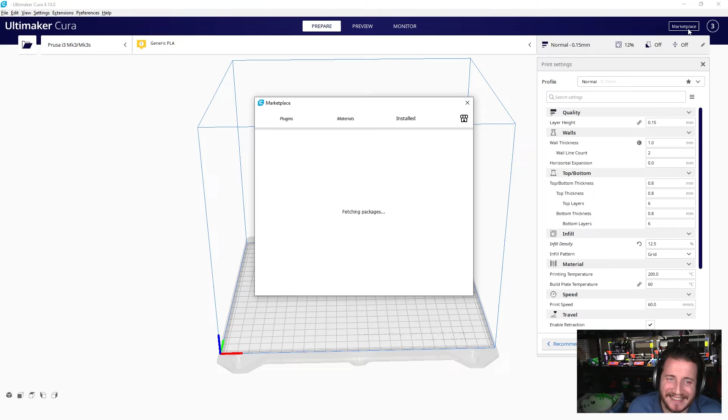But I don't have too much of an issue with Cura. Ultimaker has some amazing security policies, and they show them all to you. So let's take a look at the marketplace. The first time you load in the marketplace, it is going to take a little bit to load. So it's not your computer, it's just the marketplace is slow.

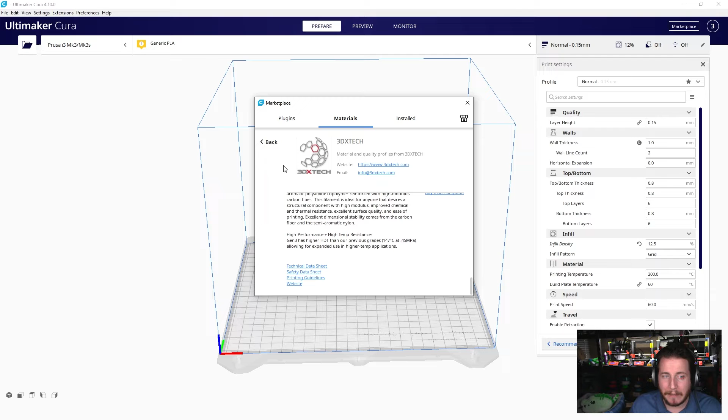Just let it go. Now, these are some of your basic plugins that work with Cura. I believe there are 58 in total. You've got materials as well. So if I wanted to say, pull some 3DXTech materials, you can pull quite a few of them. People have put these in there already. And you see that there's lots of other options available too. You guys can see these are all of my installed ones.

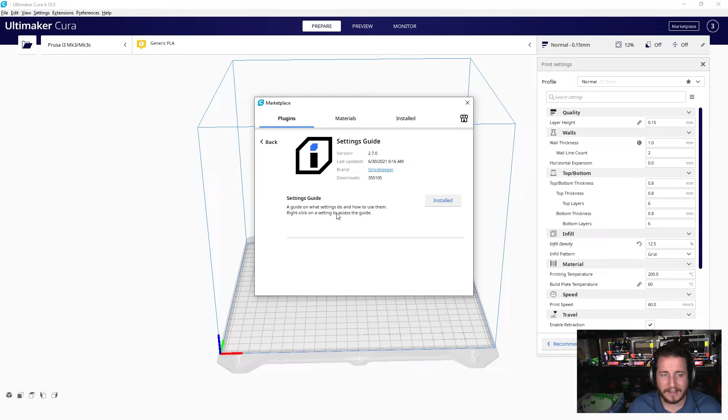Let's just go through them. The first and foremost plugin that everybody should have, and if you don't have it, go get it right now, because it makes the actual user experience of Cura considerably better. It is called the Settings Guide. It is a guide on what settings do and how to use them. Right-click on a setting to access the guide. It is the most important marketplace item. If there is one item that you get, it should be the Settings Guide.

It is just brilliant and useful for both newbies and experienced users, since most people do not know all of the hundreds and hundreds of settings by heart. And yes, there are hundreds of settings inside of Cura. It's kind of crazy, and spoiler alert, this thing is way better than you think it is. There are, for some of them at least, pictures of how it works, phenomenal descriptions, and even on ones that have way more detail, links to take you to other websites to learn more. Man, so good, so freaking good.

The next one is going to be Mesh Tools, and this thing adds several mesh analysis and manipulation tools. This is by Field of View. You're gonna see this name come up a couple of times. Field of View makes a lot of really great plugins for Cura, so keep an eye on them for future plugins coming soon.

But it adds easy tools to help you split STLs that contain multiple meshes into separate parts, which is something that Prusa Slicer can do. If you're wondering all about Prusa Slicer, we'll card to that video right here. But Cura can't until this add-on.

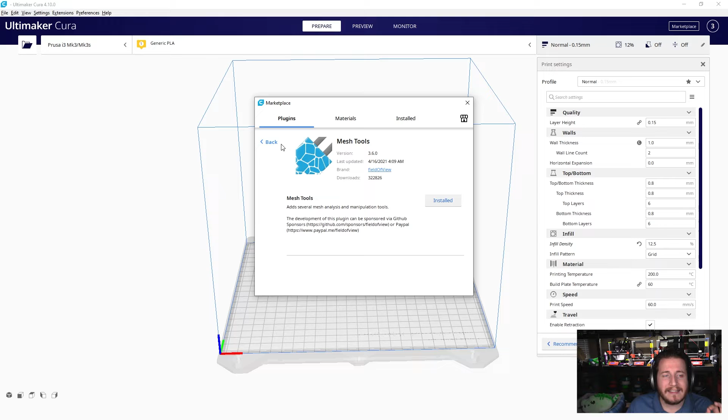This is great, and again, these are all free, freaking free. The fact that this kind of stuff comes at no additional charge to the consumer is mind-boggling to me. And it makes sense why Cura's like, we're not gonna take the time to implement it, because there are such good implementations on the plugin side. And yes, quick Google searches will lead you right to the marketplace, which is right up in the top right-hand corner of your screen.

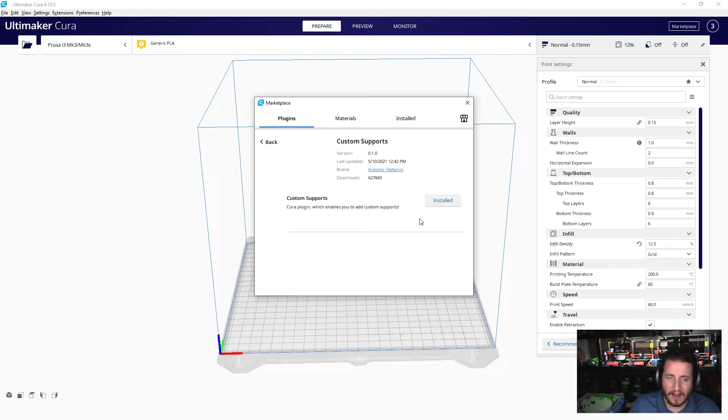We've also then got something that I wish Cura would bring in natively: their custom supports. It gives you tools to easily create custom support material if you only want it in part of your model, or want to add to support you've already generated.

But do note, this is exact verbatim from Eric: one thing that is a bit unintuitive with the custom supports plugin is that the support you place are affected by all the normal support settings, which are hidden if support generation is turned off. So if you want to have support in a specific place, you might have to turn on support generation, set the settings as you want them, and then turn off support generation again before slicing, so you don't have supports added everywhere. And I think those big things are more toward the contact Z distance, the overhang threshold, and how far your support is from your part.

So do make sure that you do that, because even if those settings are hidden because you have support turned off, it still matters. Something to note, but I believe once you understand that bit of it, it makes sense, right? That inherently makes sense to me. It doesn't use its own custom set of settings, it pulls it directly from the machine itself.

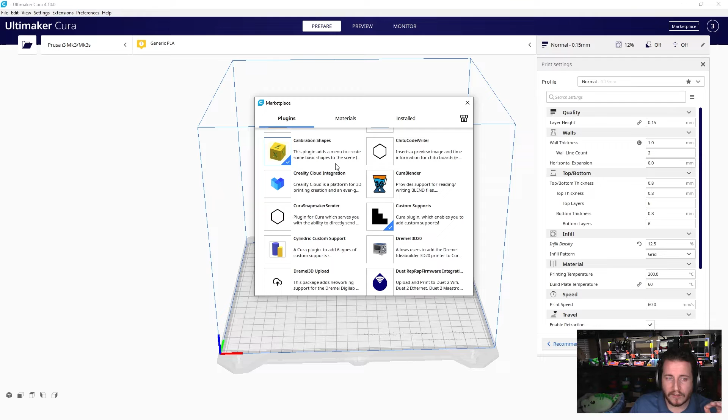Startup optimization. Now, I already have startup optimization installed. What I can tell you is, from my experience, it does save some time on the startup. What it definitely saves time on is all of the computational math that occurs inside of Cura, because it only loads the things that you need.

Cura has an architecture that loads exactly every printer, material, and profile that you have installed in your system each time you start it, and this makes the startup process pretty slow, especially on low-end systems. This is even further exacerbated when you have hundreds of printers and materials that you're playing with. This is why businesses tend to grab onto a brand or two max, so that you don't fill up your printers with tons of different ones. The more you have, the more cumbersome this is.

Now, this is a pretty clean install of Cura, so there's not a whole lot on there. So Startup Optimizer doesn't do a lot for me. Mind you, we are also running a reasonably high overclocked computer, which definitely doesn't point to why the computer randomly locked up when recording a video.

It couldn't be my fault now, could it? But it does assist this, and that's important to me, right? It disables loading of anything that is unused, any materials you're not using, any profiles, and just loads what is relevant to you currently. Now, if you go to switch in other things, it will load those as you go.

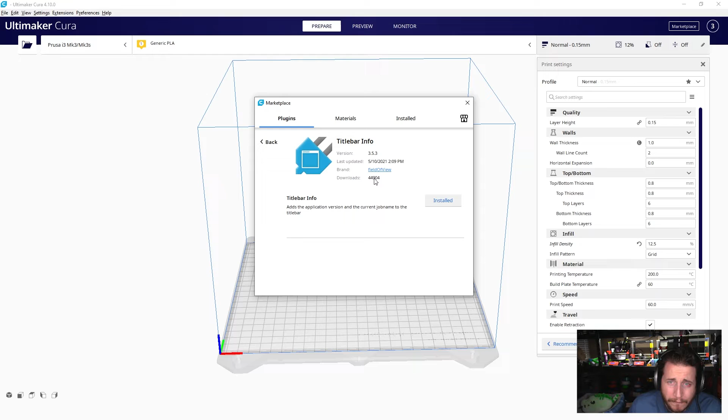And again, another awesome Field of View add-on. The next we have is Title Bar Info, which again is from Field of View. Awesome, and there's over 44,000, almost 45,000 downloads of this, because it adds version and current job name to the title bar, which sounds so freaking simple, but you know what? When you have multiple windows open and you can't easily see all the little previews that it gives you, this is great for going through and choosing the ones that you want.

Beautiful to have, absolutely highly recommended.

Then we get to one of my favorites, and it was one of my favorite features. I believe in Matter Control, it is the measuring tool. This allows you to measure parts, and this would have saved my bacon the other day. We were printing a multi-piece part, everything fit together with mortise and tenon, pin and hole. Well, I accidentally had horizontal size compensation turned on. Had I had a measuring tool inside of Prusa Slicer, that would have saved a few hours of manual labor, and in a few cases we actually just reprinted the parts. It would have resulted in less frustration in the end.

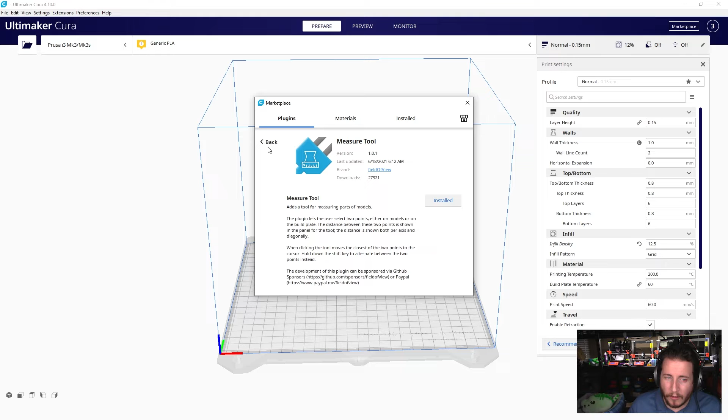Very valuable, again from Field of View, but only 27,000 downloads.

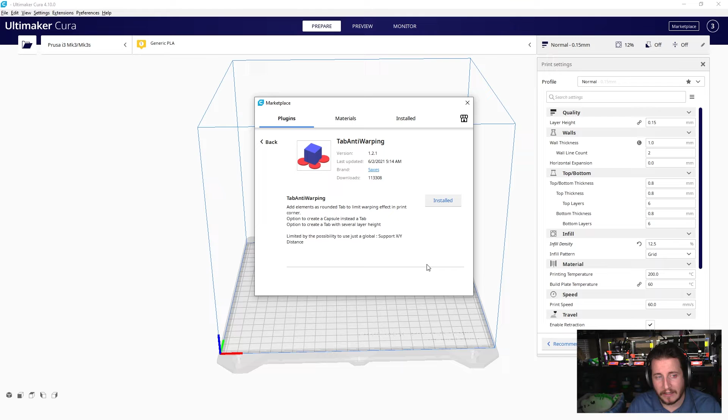We have one that I love from Super Slicer, and we'll put the Super Slicer card to it as well. It is the Tab Anti-Warping, so let's open it and take a look. It does exactly what you think: it adds tabs to corners of parts, and when you're working on big models, just like I talked about inside of the Super Slicer video, tabs are incredibly valuable. There's not an easy way to do it inside of Prusa Slicer, but there's an easy way inside of Super Slicer. And with this plugin, there's a very easy way to do it inside of Cura.

113,000 people clearly agree with this. Amazing. If you don't have this, install it. These are all very much massive quality of life improvements, especially if you are printing often.

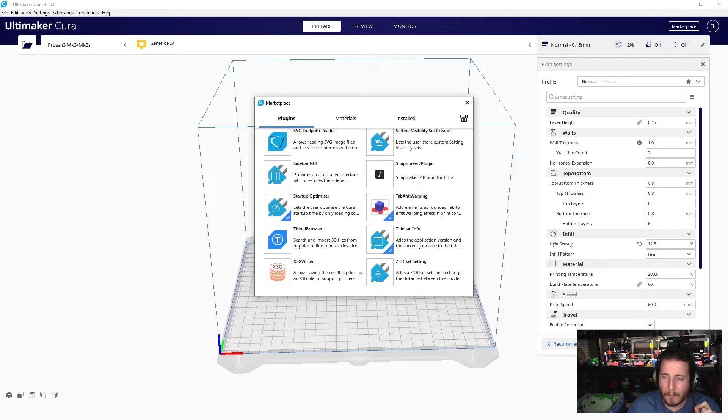Now these next ones are vague, okay? They are your integrations. Everything from 3D Printer OS, you've got ones for Creality Cloud, for Dremel printers, for Duet and RepRap, which would be so much easier. Uploading directly utilizing Dremel 3D, FlashForge, SnapMaker was in there, Hydra's in there. There are a lot of printer brands that have direct-to-print buttons that work inside of Cura, so you don't need to save it to an SD card or upload it via USB. It instantly does all of that work for you, which makes it really, really simple. Mind you, a lot of them are pre-supported inside of Cura, Prusa being one of them, but these will make it easier for those that don't have it, okay?

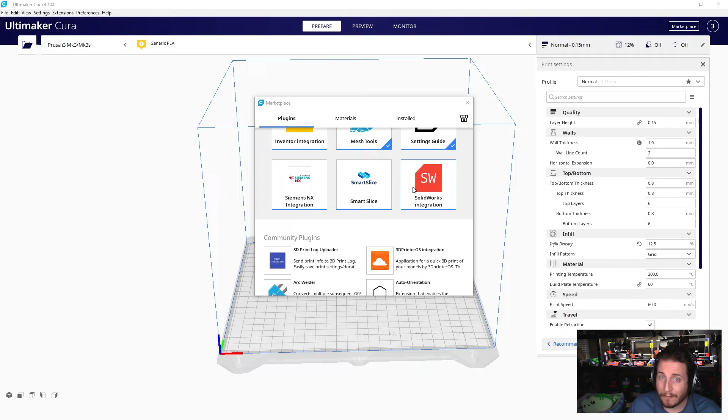And just like with 3D printer integrations, we have CAD integrations. CAD integrations are one of the next things that is absolutely amazing about these add-ons. Things like SolidWorks integration. We know a lot of you use SolidWorks. We use Fusion 360, and eventually we're going to move into FreeCAD, which, oh yeah, there's one for FreeCAD too. But SolidWorks is great because it is considered one of the industry standards. Currently there isn't a good way to go from SolidWorks directly into Cura. You'd have to save as an STL and then load it in. With the SolidWorks integration, you get one button click from SolidWorks into Cura, which is awesome.

Now understand, SolidWorks is not free, but you can get it for relatively affordable if you don't mind a student edition. So if you're just doing it for learning, educational, non-commercial purposes, you can join the Experimental Aircraft Association, EAA, and for about $40 a year membership, you get a copy of SolidWorks Student Edition for no additional charge. It's a great way to learn SolidWorks before you spend the money.

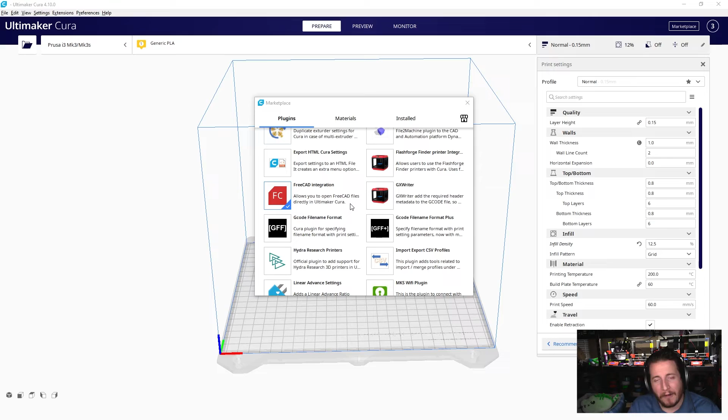But really, talking about money is CATIA. CATIA is one of those softwares, if you have to ask, you can't afford it. But it is great to see a CATIA integration as well as a Blender integration. And I like that there's a Cura Blender, which reads blend files, and that its icon is a Blender picture. I think there are just these little things like, oh, I see what you did there, and I like it. But there's also support for FreeCAD, so if you are a big advocate of FreeCAD, which I'm hoping we can get to, I want to start trying FreeCAD out, but I still struggle with Fusion 360.

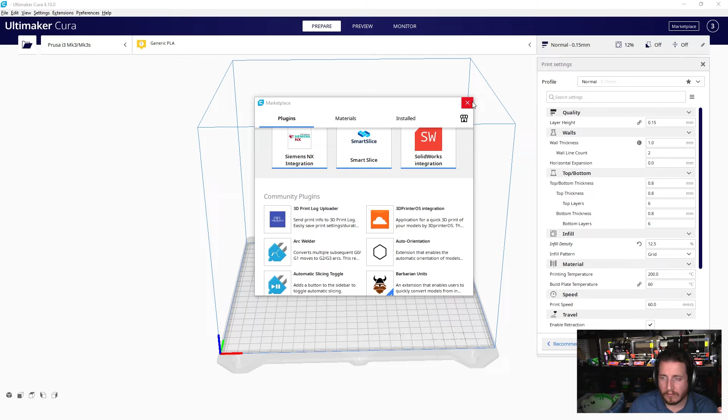Pause at height will pause the printer when it gets to a certain height, which is great if you wanted to insert hardware, like an M5 nylon lock nut, into your parts so you have threads easily available without cutting them yourself or using a heat set insert. Prusa Slicer supports this natively and it's a bit easier to find than post-processing, but this is great for those that want that extra control without hard coding it.

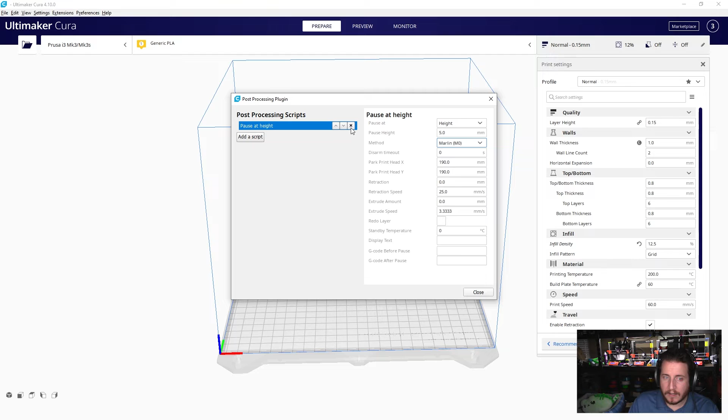Don't sleep on these - there's lots here for you to mess around with, and it's per print. So you add the script - let's say I want G-code documentation - and that's per print. It's not something that updates all your settings at once, it's just a per print thing.

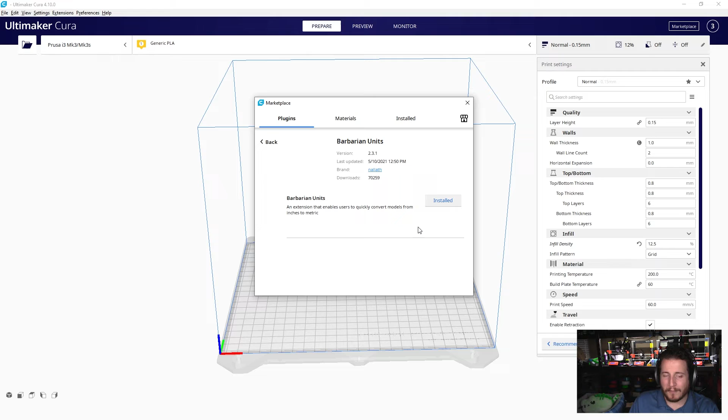And then, of course, for someone from the EU, we have an honorable mention of Barbarian Units, an extension that enables users to quickly convert models from inches to metric. There's a little backstory to this - it was written by one of the Cura lead devs in his free time and released privately so Ultimaker wouldn't have a say about the name or logo. I happen to love it.

It's for all you Yanks out there that think metric is wrong, and I'm here to tell you, no, you're wrong. If you think I'm wrong, leave a comment, and we'll definitely have a high quality discussion about inches versus metric and how metric is really the right way to go.

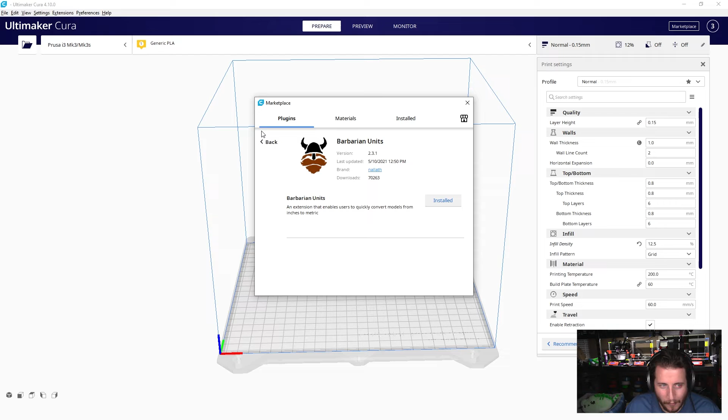But yes, it's an easy way to do it - of course you can just multiply by 25.4 and it gets the job done. But it's funny to have, and I like the name, and I love the Viking guy. I can't hate on it, man. As an American that uses inches and miles in day-to-day conversations, I constantly have to make these changes in my head - like when talking with people, oh yeah, the part's 200... I mean it's 8 inches long, because 200 millimeters and 8 inches, well it's 203.2 millimeters to 8 inches. It's close enough - the average person will understand 8 inches. The average person's not going to understand 200 millimeters, at least in the United States.

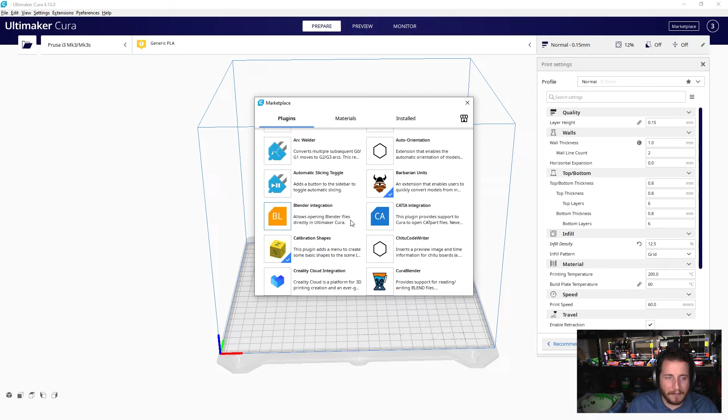But yeah, those are some great options. I also love the calibration shapes - it adds another feature I'm used to with Super Slicer that makes Super Slicer so amazing, but it does it with a plugin for Cura. So I highly recommend this as well, and it would enable you to not need Super Slicer to do all your calibrations.

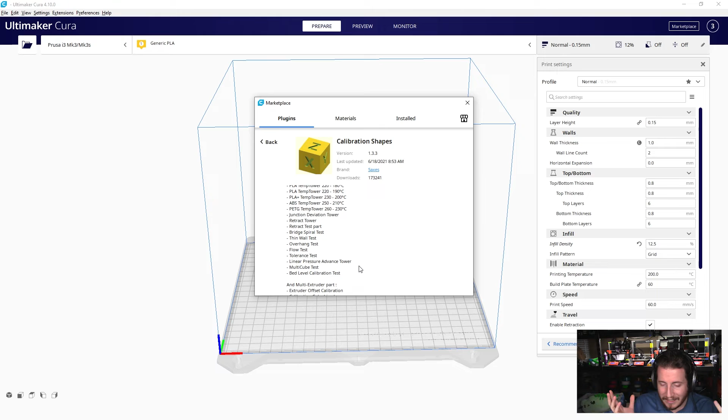So there's a lot of power here, and there's not a lot of plugins - I think there's 58 total. But when you look at what they're able to do and what they add, oh my gosh, right? Things for linear advance, like it literally just adds easy linear advance inside of your firmware.

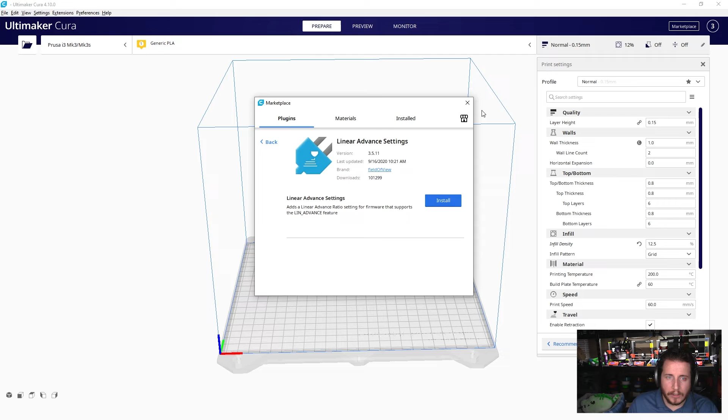So useful. But I want to highlight the general settings. We're going to go under extensions, settings guide, and click settings guide. Let's just randomly choose one, I'm going to close my eyes and click on one.

What did we get? We got infill overlap percentage. If the infill overlaps a bit with the walls, it will adhere better to the walls, causing the part to be much stronger. This setting controls how much infill overlaps the walls as a percentage of the line width of the infill. So there you go. And it even shows you a visualization of how it works.

I love this. You have your outer wall, your inner wall, your infill. Yellow is something, I'm sure, and then wipe. So yes, increasing it will result in stronger parts, but if you increase it too much, you will see it through every single time. So be careful about that.

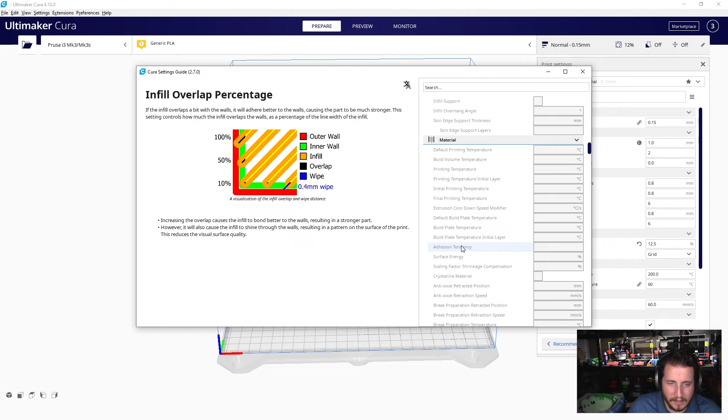Even things down to like adhesion tendency. It's a descriptive setting describing a property of a material being used to print, describing how well the material tends to adhere itself, mainly how strong the interlayer adhesion is. I have no idea what it means or what it does or how I can use it, but currently the only effect of this setting is in the prime tower, to determine which material gets used to print the strong outer shells to keep the tower up. Without this, I wouldn't know what that's for, because there's settings for things like surface energy and crystalline material, more than what most people need.

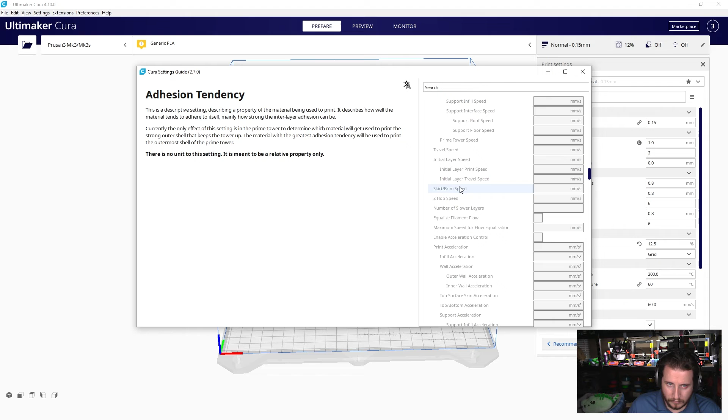We look at skirt brim speed, wall acceleration, and there was one for print jerk. Jerk in 3D printing is not the same as jerk in physics. We talked about this on a previous podcast, I believe. We talked about the jerk settings, but take a read for yourself, or pause the video right here to get a read. It's actually really interesting how the term jerk for normal kinematics and the term jerk for 3D printing are totally different, but yet they're interchanged often. It's literally due to a lack of knowledge from other people.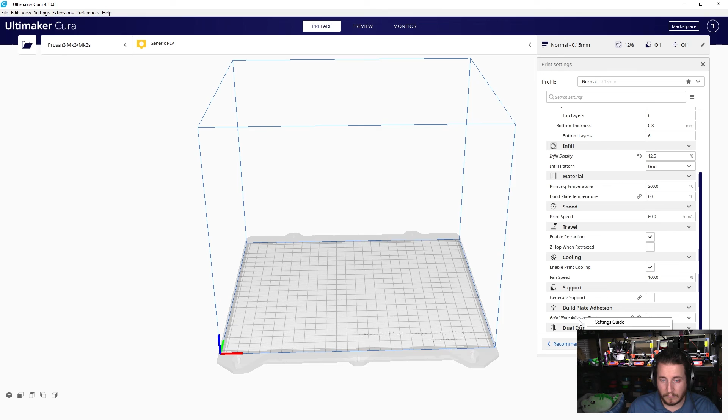I think this is cool, and apparently inside of your regular settings, just clicking on it shows you so much more. You can right click, go to the settings guide, and it will show us more information all about it, similar to what you would see from regular Cura, although I don't think regular Cura does this. I'm pretty sure this is just the settings guide, but yeah, I think it's real cool. Settings guide to me is probably my favorite one.